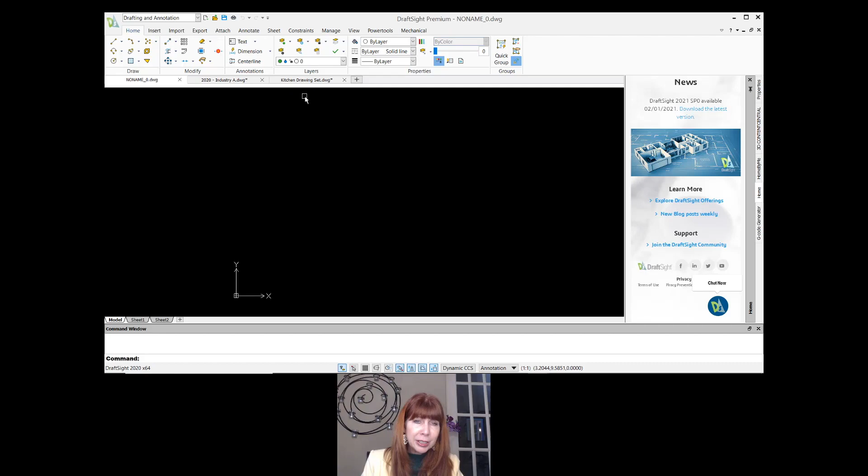Okay, what else though? I'm looking over on the right-hand side of the screen. Lynn, this does not feel like AutoCAD. I got some news, although AutoCAD does like to tell you stuff, and you do have to turn a variety of things off when you first get into AutoCAD. You and I both know that's true.

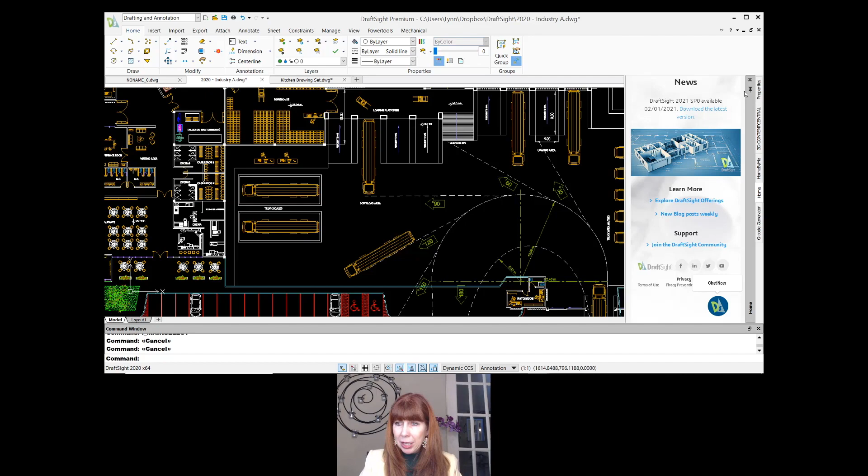Over here on the right, I have these palettes - news. All right, I guess if you want to read that, you can, but I don't want to, so I'm going to close that. And then what's this over here?

G code generator. All right, if I was mechanical, I guess that would sound pretty cool. I'm not mechanical, so I'm going to close that. If you are, you can keep it open and check it out. If you want to do some CNC programming, I'm going to close that.

Don't need that. Home by Me - first of all, you'd have to log in. If you had this product called Home by Me, I bet you most of you don't. What is it? It's actually a very cool software product. If you decide that you want to do some low stress designs on your own house, I want you to go check this out. It's a free product called Home by Me. It's done by the same company that has produced DraftSight. That's why it's an option.

But I don't have that. Even I don't have it. So I'm going to close it.

3D Content Central - oh, I like this. This allows you to have access to some content for like blocks and things like that. But you don't need, I don't know enough about that yet. So I'm going to get rid of that for now. We can talk about that another time.

And what is this? Oh, properties. Okay, something I recognize. I'll leave that one open. So the first time you go in, you might want to close some of those because don't remind me of AutoCAD, and I am not very open-minded. I like to feel right at home. Later on, you can add them if you want to.

And now I feel better. Do you feel better? I feel better. Now I really do feel like I'm inside of AutoCAD. What else have we got going on?

Let's take a look at these workspaces. Upper left-hand corner of the screen, you will see that I have the workspaces I can expect - the classic workspace. Do you guys remember this? Autodesk got rid of it. They made it so hard to find, it was almost impossible to get it back.

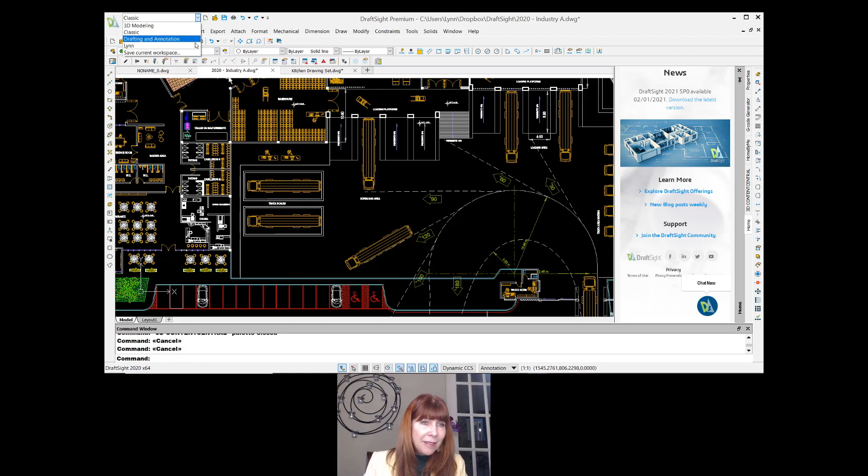There's a 3D modeling one for those of you who buy the DraftSight that gives you access to 3D. Of course there is one. I'm going to go back over to my own workspace that I have set up with just properties over there and nothing I don't recognize because I don't like change.

And it's set up exactly the way I want it to be. All right, so I feel comfortable. I like the ribbon, I'm a fan of the ribbon, I'm all good with the ribbon. Okay, what else have I got going on?

All right, we got the command line, as I mentioned down here. As I move my cursor down to the status bar, let's take a look at what's going on. Okay, the first tool on the status bar is called TB layers. And already I'm like, you're like, Lynn, we don't have a TB layers in AutoCAD. I don't feel comfortable, already I'm whining, right? It is the best tool. I'm going to talk about it later.

Snap, snore, that's on the AutoCAD status bar. Okay, but that's good, it's there. And you can see, I want you to know, the function keys are exactly the same if you use your function keys. And what else we got? We got grid, all right, that's the same. And ortho, that's down there. Polar for polar snaps, okay, whatever. That's the same, no surprises there. I feel comfortable, I'm not freaking out.

And then we have eSnap. eSnap, what's that? It's the same as OSnap, different character - instead of object snap, it's entity snap. All right, can you handle that? I can handle that, that's no big deal. Once again, fraternal twins, can't be identical, it wouldn't be right. E-track, entity tracking instead of object tracking. So instead of O-track, it's E-track. Can you handle that? Very similar. I think you can handle that.

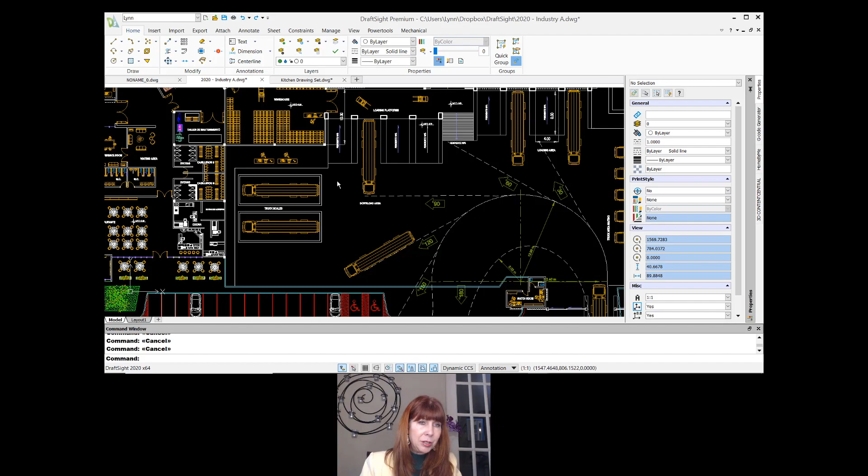I'm going to show you one more thing. My favorite command inside of DraftSight is Powertrim, which I'll talk about later. I had serious command envy of this when I worked at Autodesk. You'll see some fabulous commands, like corner trim. How many times did we have to set the fillet radius to 0, then trim off the corners? We do it all the time inside AutoCAD. Well, here it's a tool, very easy to get to. Just grab it and go. A lot of common sense things like that happening inside DraftSight.

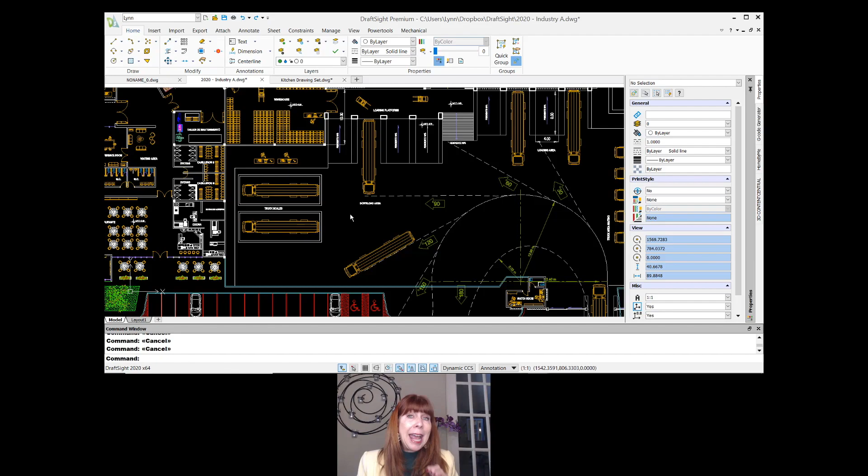What else have I got going on? If I click on an object, I want you to see this very cool command bar that pops up for any command. Here you can zoom to a selection, so I'd zoom in on that object very quickly. I can very quickly change the line type, I can change the weight. What else can I do? Pick again, sorry. You can tell it's basically live.

You can see the layer manager here, which we'll take a look at really quickly, because if you don't feel comfortable with layers, you're not going to like the program. The layer command is the third most frequently used command in AutoCAD. Entity to active layer takes the object and moves it to the current layer. Change the entity layer would change the current layer, and so on and so forth. You can see it allows you to turn this into a block very quickly - some very cool tools right at your fingertips, which I love.

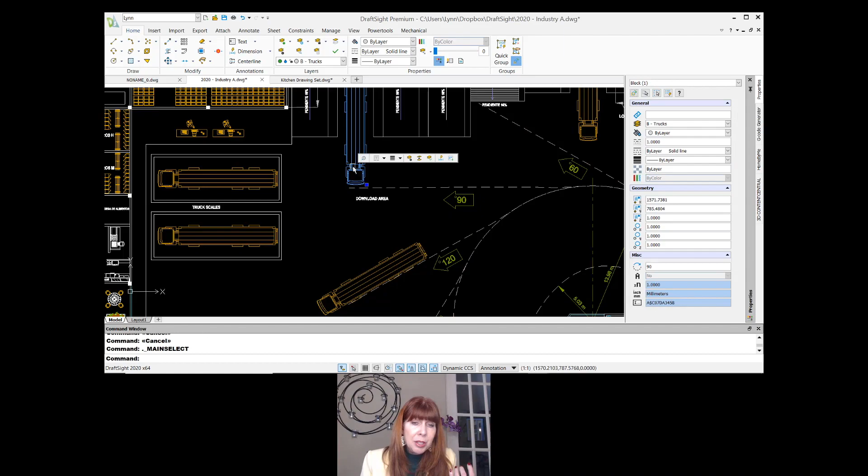All right, we have right-click menus as well. If I click on this and do a right-click, you'll see, very similar to what we have inside AutoCAD, things like select matching - that's the same as select similar. If I click on that, you'll see it grabbed all of the other blocks that were trucks. If I zoom out, you can see that. So very similar tools to what you would expect.

But here's the most important part - I told you it spoke AutoCAD. I do feel comfortable, but I really need to know it speaks AutoCAD. So if you type in an AutoCAD command, I don't know where it is, I don't know the name of the DraftSight command, like purge for example. If I start to type in purge, you'll see it recognizes you're trying to speak AutoCAD, and it knows you're trying to execute the DraftSight command clean. Purge - oh my gosh, that's like a terrible name for a command anyway, isn't it? Named after an incredibly violent movie. Let's face it, you're trying to exorcise the demons from your AutoCAD drawing. Anyway, purge - this is a much sweeter name, clean. So if I type in purge, you'll see it goes into the clean command. It doesn't have any problem speaking AutoCAD.

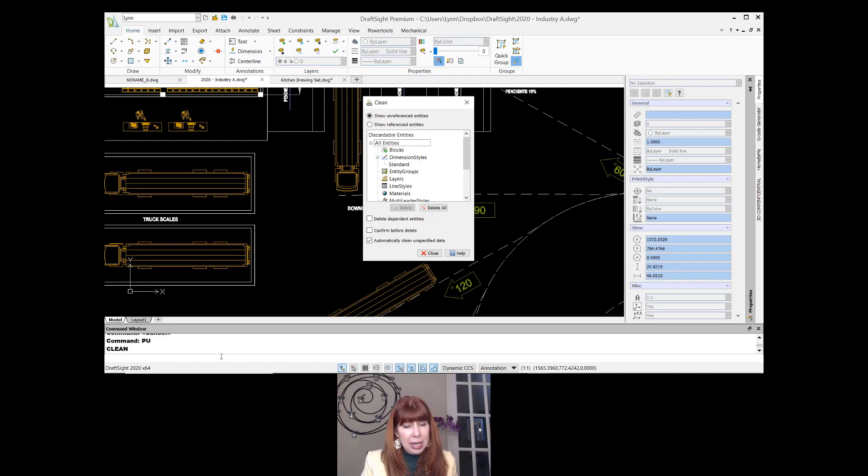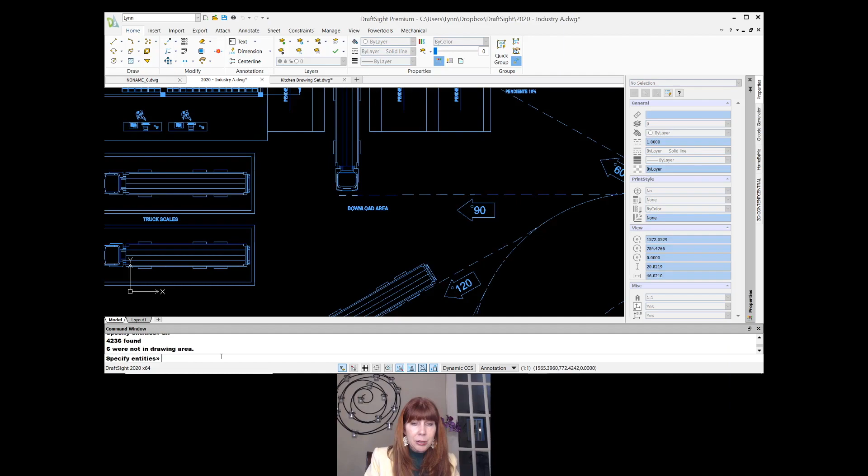Another example - if I type in overkill, that's another command I like to use a lot in AutoCAD which deletes duplicate objects. If you're not familiar with that command, you'll see it immediately executes a command called discard duplicates. Well, that's a mouthful, right? But if I go into that, it takes me into the command for discarding duplicates. I'm just going to tell it I want it to check out all of the objects in my drawing. So some very cool tools, very easy to work with. I can feel right at home very quickly.

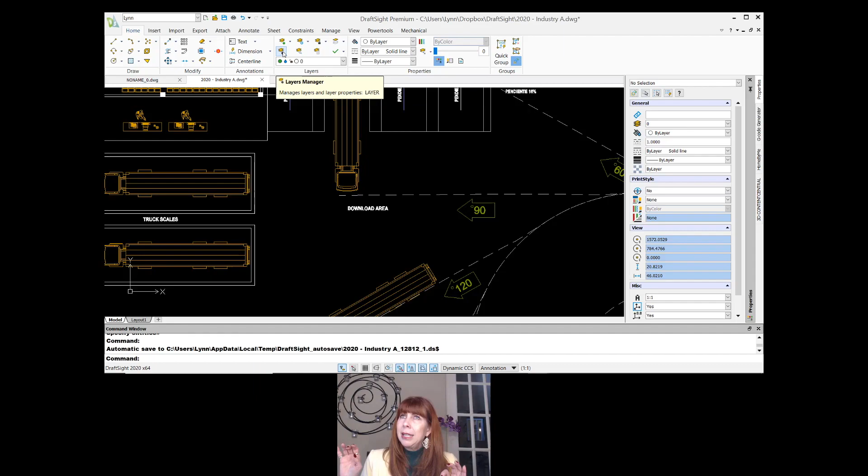I promised you I would go into layers. I can type it in from the command prompt, or I can get to the layer manager. Right here you'll see it's not layer manager, it's layers manager - we will not charge you for that extra character. So once again, fraternal twins, not identical twins. You'll see it's a beautiful dialog box. I was a math major, I love grid lines. It's so much easier, I think, for you to see what layer has what color, are they frozen or locked or whatever. It's very obvious here. It uses all of the screen real estate, which makes me happy.

Very similar, nothing surprising in here. The same four tools are in the upper left-hand corner of the dialog box: new, for creating new layers, VP freeze, delete for deleting the layer, and activate your layer. There's no activate inside of AutoCAD - that just allows you to set a layer to be the current layer. So instead of current, it's activate, which I think makes more sense anyway, because look, all my layers are current, right?

They're all with me, currently in my drawing. I like activate much better anyway. And you know what else I like? I like that there's words on here telling me what these tools are. I can read, can you read? We can read. I love it when I don't have to sit and wait for a tooltip, don't you?

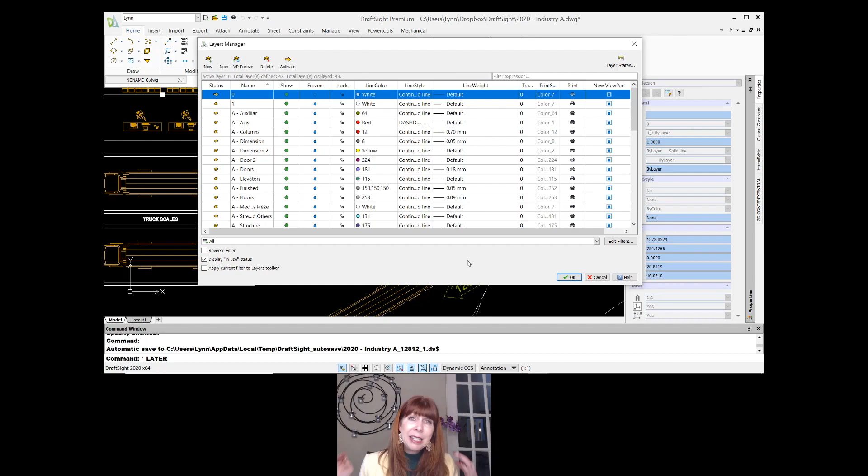You'll also see that I have the ability to go into the layer states manager over here, and that I have the ability to do filters. So just like everything that you need is here in this dialog box, you should feel right at home in no time at all. Very low stress. I think I showed you a pretty good tour of what it's like to run around in here. Really no surprises.

Let's go back over to our PowerPoint. And here's just another example of what I was trying to talk about.

Here's object snaps versus entity snaps. Just so you know, in the early days of AutoCAD, objects were called entities. Then somebody declared we were not going to call them entities anymore, we were going to call them objects. I spent the first 15 years of my AutoCAD life calling them entities. I had to flip them to objects, and now here I am in DraftSight, I got to flip the thought back. So hopefully it's easy for you to make that very simple, low stress switch.

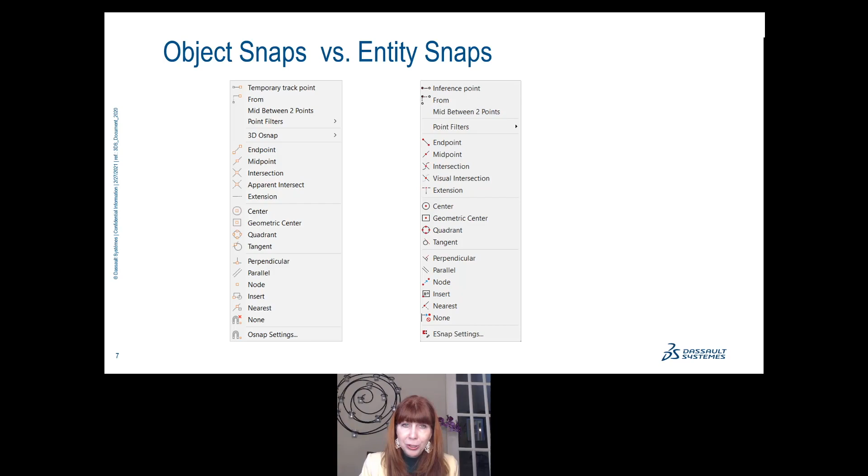But look at how similar they are. You can see that while the name may be slightly different, the purpose is exactly the same. So you should be able to very successfully and easily use the object snaps. You probably don't use them all anyway. Do you use them all?

DraftSight also reads DWG files backwards, forwards, no problems, and of course template files, DWT, DXF files, you name it. I like to joke, nobody needs to know. So if you're working with a customer who has AutoCAD, they send you their DWG files and you send them DWG files back, no problem. Once again, nobody needs to know. It's your little secret, and it's a million other people's little secret, by the way. You can be proud to let them know you're using DraftSight, or you can keep it to yourself. It's completely up to you.

I remember when I worked at Autodesk, someone came up and told me they had both AutoCAD and DraftSight. I asked why they had DraftSight, and they said they actually use it, especially because they needed to save back to a file format that AutoCAD didn't support anymore but DraftSight did. They also noticed that when they had a corrupted drawing file, they could bring it into DraftSight, which would fix it, and then they could use it again in AutoCAD. I don't know if that's still true, but the point is DraftSight does a beautiful job working with your AutoCAD DWG files. I think that's the takeaway there.

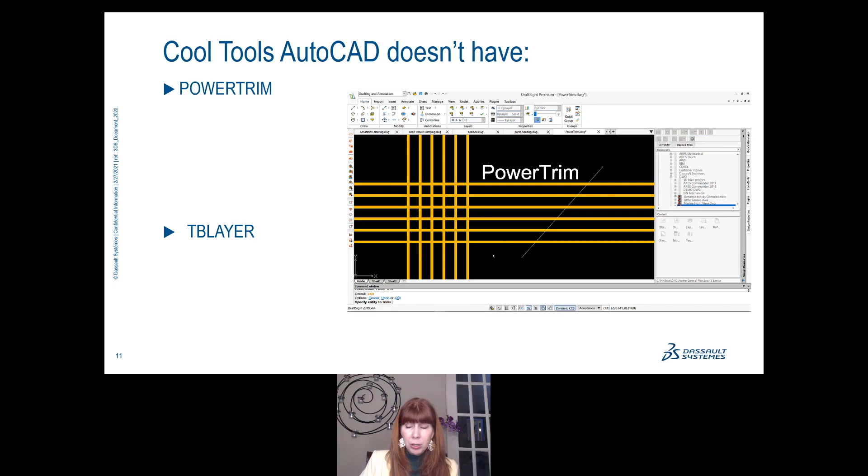And then TB Layer—I mentioned this to you, that it's on the status bar. Well, this is what TB Layer is. It allows you to assign a layer per object type.

So you could say, I want all my text to go on a specific layer, I want all my dimensions on a specific layer, I want all my circles on a specific layer. You have many options available, hatching and so on. Now, you can do this with some objects inside AutoCAD, like dimensions and hatching, but this allows you much more capability, and I absolutely love this.

It's all laid out in a very nice dashboard inside AutoCAD—you have to know all the different places where you go to set them up. This is beautiful, I absolutely love this.

One of the things I also want to point out is that as you go through DraftSight, it feels a little mechanically focused, and that's because DraftSight was originally designed by the people who created SolidWorks. SolidWorks is like the number one solid modeling program in the world for mechanical—it's a great product, and it kind of has that focus.

But surprisingly, most people who use DraftSight are actually in the AEC industry. So they're starting to put more and more AEC tools in it, and you'll see it starts to feel a bit more comfy and cozy for those of you in the AEC industry, FM industry, and things like that.

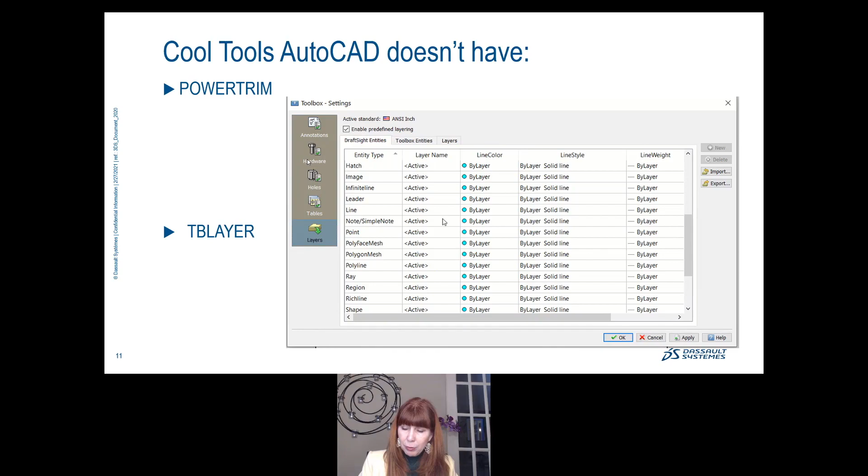Something called gestures—this also came from SolidWorks. The ability to set it up so that when you hold your right mouse button down, you just hold it down and move to the right or the top or wherever, however you set it up, and it will actually execute a variety of commands.

You get that little wheel on there and you can very quickly execute a command. I just did a video tip on this for an online magazine called Cadalyst—CADALYST. Just Google me, Lynn Allen, and gestures, and you'll find it if you want more information on this.

But this is another really cool tool that I wish AutoCAD had. And for those of you in the Mac world, you might be familiar with these as well. These gestures are great, and you can set them up to have whatever cool tool you wanted to execute.

You wanted to execute Powertrim—that's what I set it up for. So it's always right there available to you; all you do is hold that right mouse button down and go. I love that.

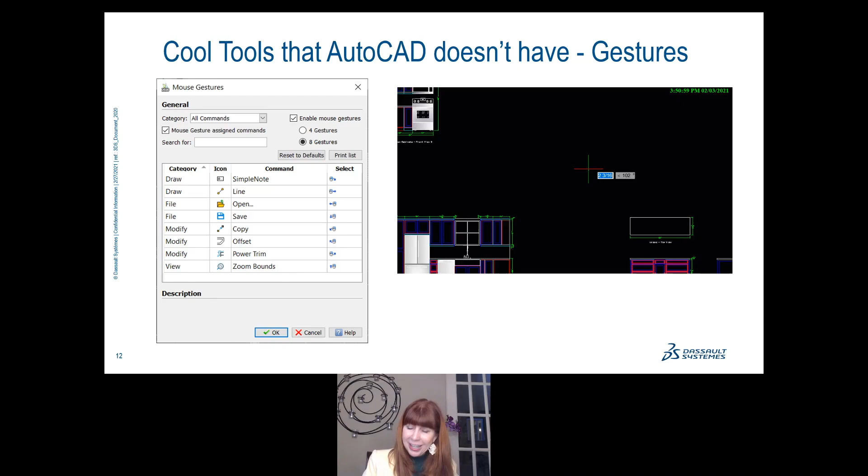Or maybe save, or I would put the layer manager on there. Wait, it's the Layers Manager, right? Not layer—Layers Manager. All right, so the point is you're going to see some amazing tools in this product that we don't have in AutoCAD.

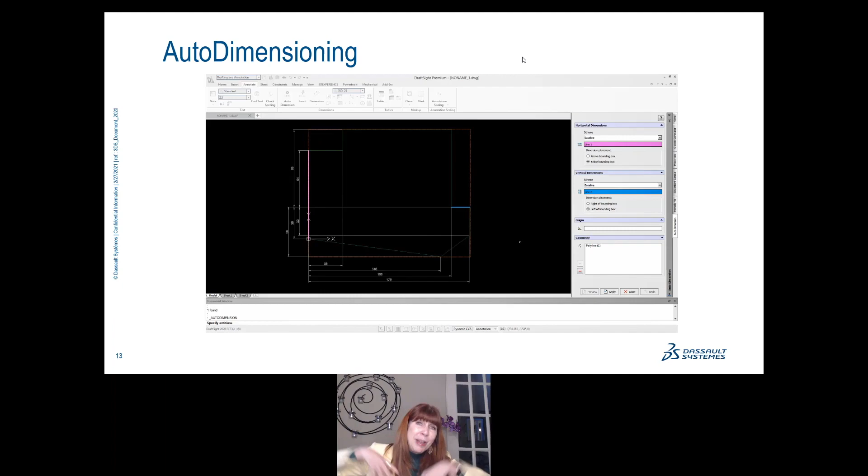And I'm going to end on this one. When I worked at Autodesk, I used to say, I just want a command for dimensioning where I can just window everything and then magic will happen and the dimensions will appear. That's kind of what auto dimensioning is. Oh yeah, that's what it is.

You window the objects you want to dimension because maybe it's not all of them, and then you basically tell it what type of dimensioning you want—to the right, to the left, above, below, whatever—and then you're pretty much done. You just click accept, and let me tell you, that is a beautiful thing.

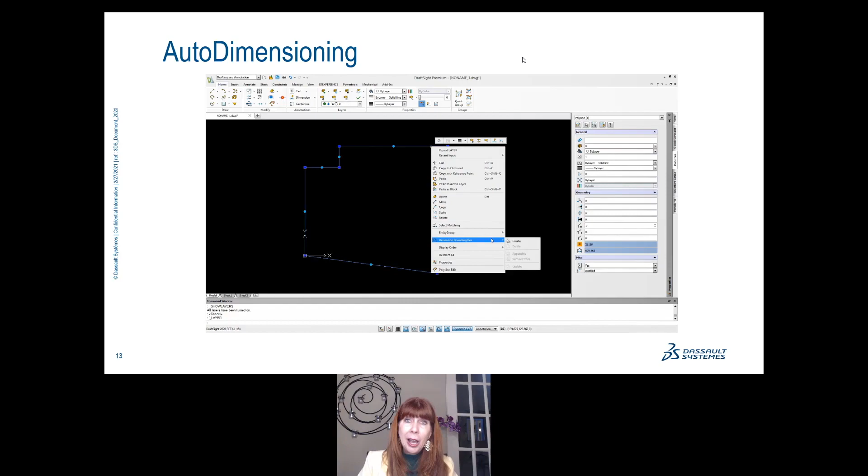Auto dimensioning, and you saw the bounding box down there on the status bar. We talked about that - auto dimension. It should just say magic on there. Magic dimensioning. Why don't they let me name these things? Maybe they will.

What about your customization? Let's be honest - here I want you to know what you're getting and what you're not getting. If you have written Lisp routines, no problem, those will run. If you've written visual Lisp routines, they currently do not run. They will run in the next release, or they're just about to come out with visual Lisp. By the time you watch this, it may already be in the product. So I wouldn't let that slow you down, because you're going to get that. And I know a lot of you out there have written Lisp routines - those of you who are really into your product probably have.

Then aliases, your PGP file - this is where I'm coming clean with you. If you have written a whole bunch of your own aliases, you're going to have to do it again. And I get why that's the case, because it speaks AutoCAD, and it does that through its own aliases. So when I typed in purge, it did the clean command. I think it would be really complicated for it to know which ones are your aliases or its aliases. Consequently, it's a no-go on the PGP. I don't think that's so bad, but you need to know that's the case - you're going to have to redo those.

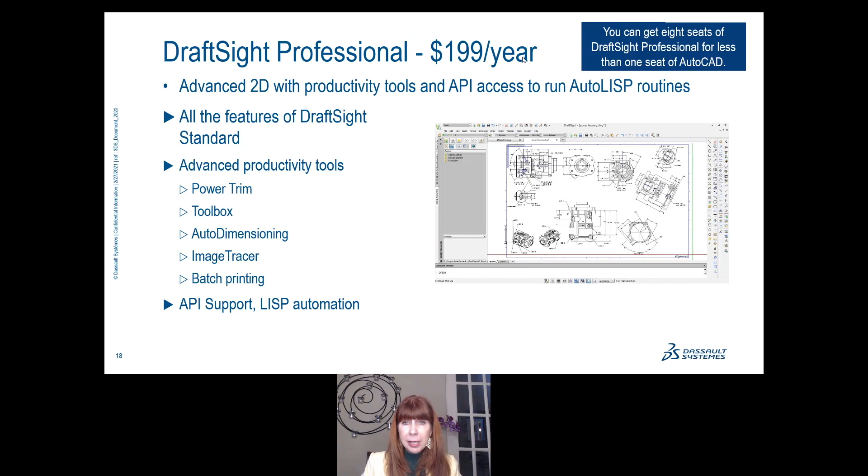To me, this is really the most popular product in my mind, and still a fraction of the cost of AutoCAD LT, and it has Lisp, and LT doesn't have Lisp. I just think this is the cool one.

Then there's DraftSight Premium. This is really for those of you who want the 3D capabilities. If you decide you need that X, Y, and Z, you're going to need to up your game and go for DraftSight Premium. That's $499 a year, but you get some great, very impressive 3D tools. Remember, this came from the company that designed Solidworks, so they totally understand the land of 3D.

You also get 2D constraints, which is a nice feature that doesn't even have anything to do with 3D, which allows you to set up constraints in your geometry. This circle is always going to be the same size as this circle, so you can set up a constraint between them. If you modify one circle, the other changes as well. So that's something for you to think about.

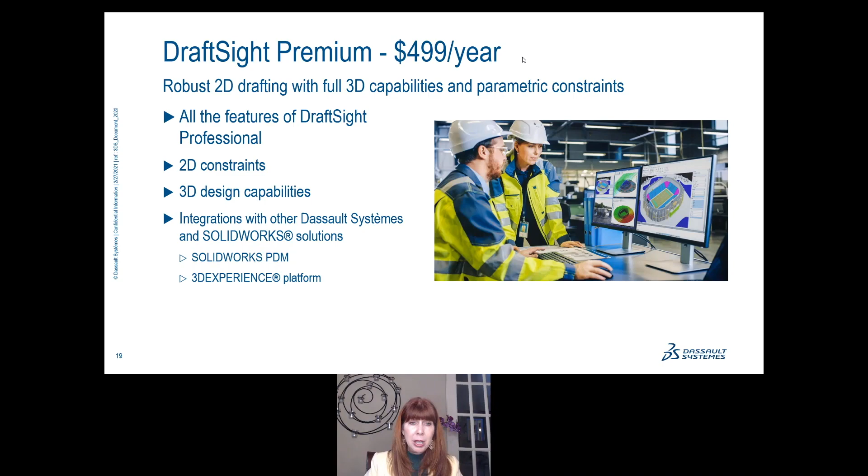Okay, and then we also have something called 3D Experience DraftSight. This is last but certainly not least. This is for those of you who maybe have a cloud initiative and really want to up your game completely. This is going to take it even further than AutoCAD can, in that you'll be working with the 3D Experience platform, which is phenomenal.

All your data is going to be up there in the cloud. You'll be working up in the cloud, and you'll be able to collaborate and access your data anytime, anywhere, on any device, which is something, thanks to COVID, we've certainly learned the importance of. So many companies are making the move over to the cloud, so this is another option for you, and you would also talk to your reseller if this was something you were interested in.

So don't listen to me. I'm a big fan of try it before you buy it. You can download DraftSight for free for 30 days, literally no strings attached. You don't have to give it your credit card. It always drives me nuts when you put your credit card in and forget to cancel and then they charge you. There's none of that going on here. At the end of 30 days, it just stops working, period.

And no animals are harmed, okay? So all you have to do is just Google DraftSight. It'll send you to that free trial. You can try it for yourself. And I think that's important because the commands that I feel are essential for my happiness may not be the same as yours.